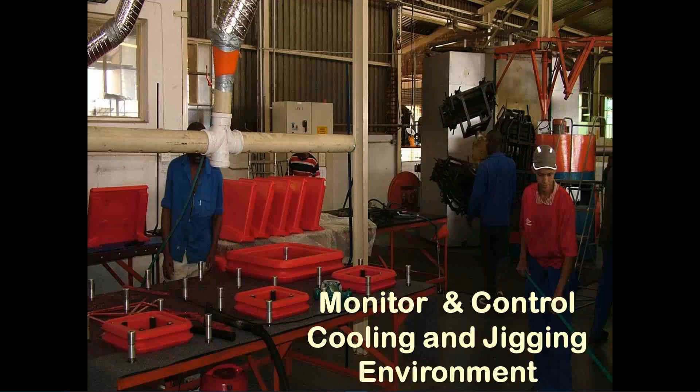I was fanatical about trying to be the best. Here's a picture of the environment of the machine - air-conditioned tables, guys sweeping there while they're working, cleaning. We eventually issued everybody with white jackets to make sure they stayed clean. You can see the condition of the machine in the background - the molds are black, and they're not dirty, they're black because they should be black. The machines are nice and silver. So yeah, I was fanatical about trying to be the best and do the best quality.

This product being molded here, by the way, was a job we took away from blow molders. So I'm very proud to say, even in small products, we took products away from blow molding because of our high speed - we could produce like 1,200 of these parts a day. All right, I started consulting in 2004.

And this was about 3 years before I actually sold my business. Professor Roy Crawford, a very good friend of mine, considered the guru of roto molding, visited my plant every year from 1999 until 2004, and eventually convinced me to get out and start teaching. Because in '86 I started traveling the world to learn - Australia in '89, Europe in '94, America - and wherever I went, I found I could teach. So Roy visited my plant and eventually got me to go out and teach. And that's where I am today and why I am here today.

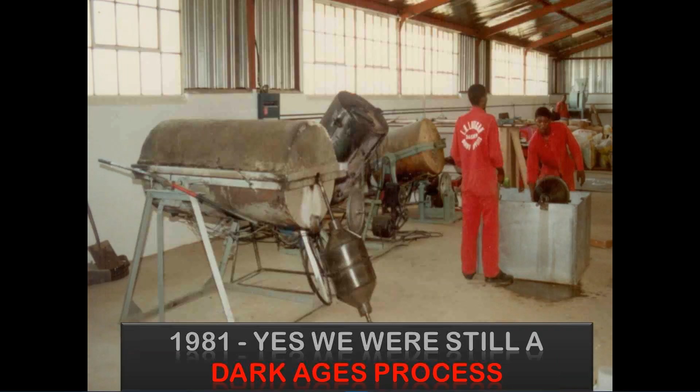The reason I got it up there, it was closed - totally closed. And if you see the molds there, sorry, there's somebody who's got quite a bit of interference on the mic. It sounds like there's water running. I don't know if anybody else can hear it, but hopefully they can switch it off.

But this mold, as you can see, was totally closed. The vent tube was through the shaft. So we would stand outside the mold in 1979, look at the machine spinning, and say, wonder what is happening inside the oven, inside the mold.

Unlike a lot of you in India today who still have open molds and open vent tubes where you can take torches and look inside, from day one I could never see inside my molds. I never had an opening big enough to look inside. So that became my obsession.

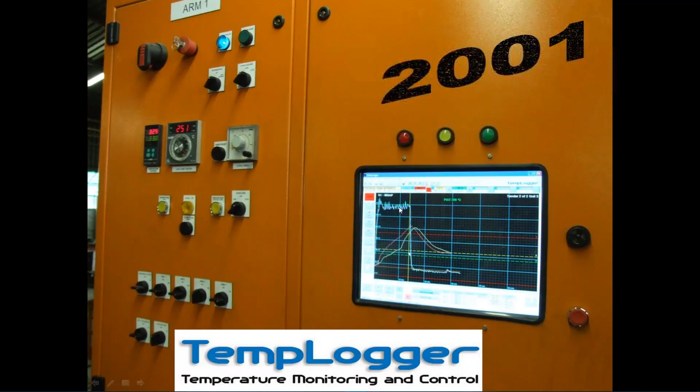I wanted to stand there and actually know what was happening inside the mold, and that was a passion of mine. My motto in those days was: measure it, and if you can measure it, you can control it, and if you can control it, you can improve it. But one of the things we could never measure was what is actually happening inside the mold.

So I started a journey of trying to discover what is happening in the mold. As I'm saying this, I'm a little ahead of myself on this slide - I think most get a feel of what's happening in the mold.

Now, I'm going to refer to India specifically all the time because this is mainly for India, and welcome to the 1 or 2 international guests - I believe more might be joining us later, some said they're not getting up this early. I'm very proud of Anthony, sitting in Argentina at 2 o'clock in the morning. Nobody can beat that one so far.

But to look inside the mold, if it is possible, like on R&R which I've just explained on my machine, it was not possible. Most of you will use torches and mirrors, again if it's possible. But then if it's a turret machine, carousel machine, or shuttle machine, it's not that easy.

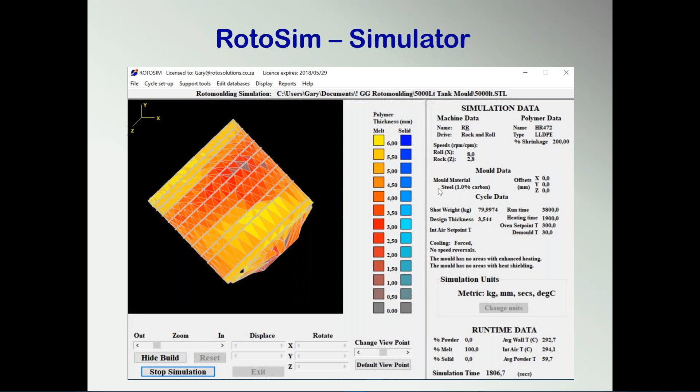So that you could actually use this program not just to simulate up front, but have it running live with live input from Templogger, or in those days Rotolog, showing the operator standing and seeing this mold spinning in front of his eyes, and he would actually be able to see what's happening, where the polymer is starting to stick. And if it wasn't sticking where he thought it should, or if he wanted it thicker, he could make real-time adjustments.

Now I'm going to start the first video, and I hope they work. So let's see - this is a simulation that I just did. That's your mold spinning, you've got all these settings on the side.

It's very complicated. I see on my screen it's running nice and smooth, and on the GoToMeeting it looks like it's quite jerky. Is that correct? Is it jerking or is it running smooth? Can somebody confirm?

Anybody confirm for me, is it running smoothly? Okay, so now there's the polymer sticking, the polymer starting to stick.

Now you can see, what you do is you import a grid, which you can generate in most CAD files, of your actual product from the drawing into the program. You then give it your machine settings, spinning at this RPM. This, as you can see, is a rock and roll with a 5,000 liter. So it's just doing the rock. There's the rock, and it's rolling at the same time.

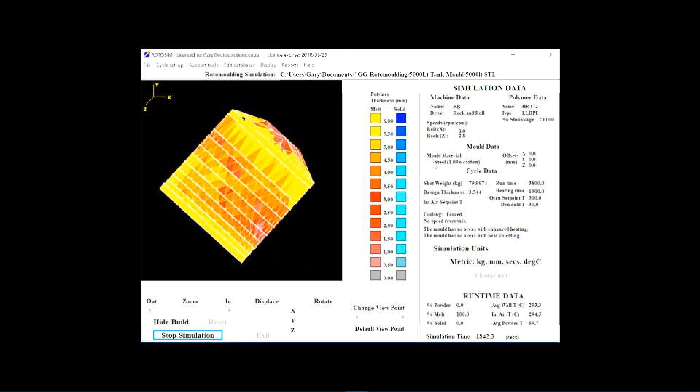I've shown it at some slow speeds and high speeds because I'm going to go back and walk through this again. What we found, without being able to see into the mold, is that if I spin quickly, the faster I spin and the faster I rock, the more evenly I cover the mold. So even though I couldn't see into my mold at this stage, I could predict what was going to happen in a simulation, and then go and try it.

We'd run it. We would actually run for when we estimated the polymer was starting to stick to the mold. According to RotoSim, it would say at about 10 minutes you've actually got product sticking there.

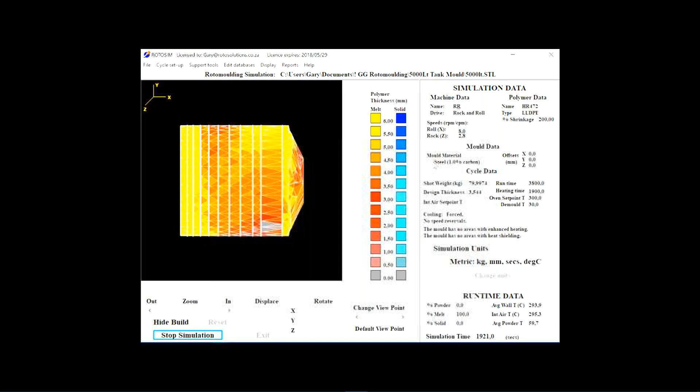You can see now, I'm just going to keep referring to the video. Now it's rolling in one direction. Some people call this a dwell. If you notice beforehand, we were just rocking and rolling. Now most of the world dwells, they stop in a position, and a lot of Indian companies do not dwell. I do not like the dwell.

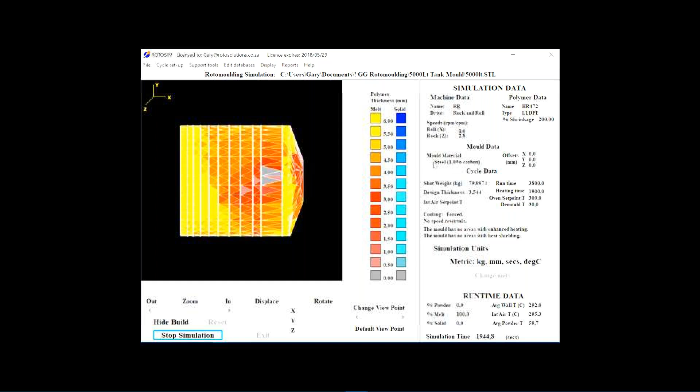Also your cooling, a lot of people will rock and roll while cooling, and yet in the cooling stage is when you don't want to rock and roll.

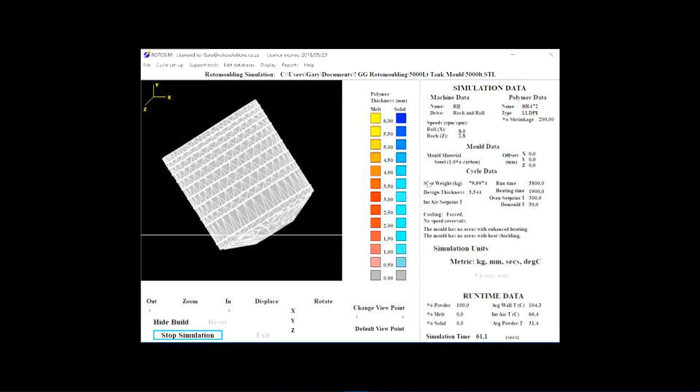I'll just let this run again while I continue to talk about it. That white line running on the screen is the estimation of where your powder is sitting, for those of you not familiar with RotoSim. In other words, if you look inside the mold, the powder is lying just at the bottom of the mold, okay, 90% of the time.

When the powder is lying at the bottom of the mold, and we heat the mold, and it rotates away from the flames, it starts cooling down. We've actually done tests showing the mold heats up as it passes, especially over open flame. Then when it goes away from the flame, if you're rotating too slowly, you'll find the mold surface actually cools down, and then you heat it up again, cool down and heat up. This is not good for our process, for time, for quality, for anything.

So playing with this tool, I was coming the closest I could to actually understanding what was happening inside the mold, but keeping in mind, I still never had eyes inside the mold. Great tool. I got them, I was one of the developers. I never paid for this program because I was considered a development molder. I used to give them feedback, what's wrong, what's right, what works, what isn't working. Even today I get demo units from them and I'd run them.

Must ask for an update. There's another program that's come on from a German university, but they're not selling it, which looks very good, more realistic looking. But RotoSim, for the average person in the field, can help you. It would be very interesting to know who's got RotoSim.

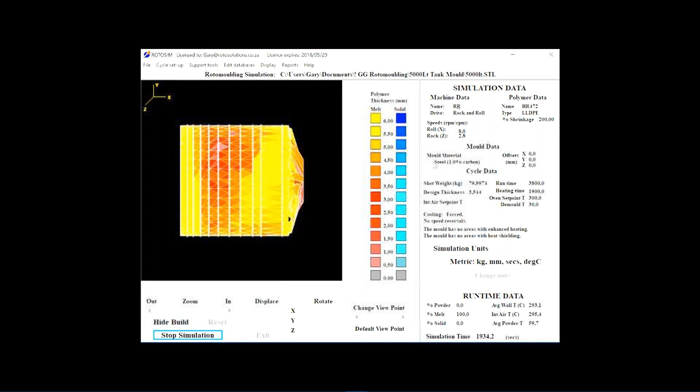Okay, what you'll see now is on the actual tank there are different colors. The different colors represent different wall thicknesses. This test we did very funny and very strangely, we just spun it at funny speeds and things just to get unevenness, to show people. Because if we coated this perfectly, it wouldn't actually show up. So in this case, while it was running, I did some crazy settings.

As you can see, there's areas that are gray, areas that are red, areas that are yellow. If you look at the bar on the right-hand side of the picture, it shows you more or less what the melt thickness was.

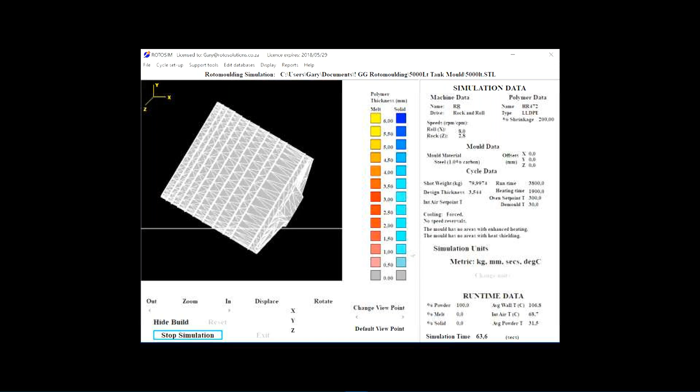Okay, so if it was yellow, it was 6 mm. If it was still gray, it had no material there at all. So just to give you an idea, it's a pretty good indicator, if anybody wants to know what's happening inside the mold or learn a little more. It's a good tool, I don't sell it - I should become the agent - but I wish I had owned this program and linked it to loggers so we could really get benefits from it. Anyway, that was another great tool. Now both these tools have been in the industry for over 25, almost 30 years.

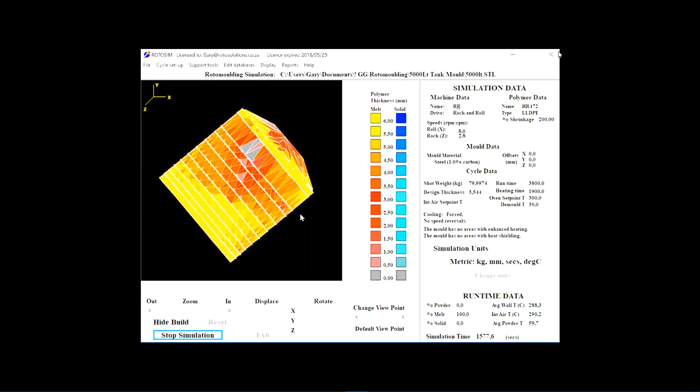Now, I have an issue here. I don't know how... there we go. Okay, couldn't get to the next step.

Unfortunately not enough work was done on it. I would have loved to have gone further, and still someday I might get to take this whole experience to another level. But when I sold my company, I stopped. What I realized is I actually stopped playing in my factory. Sorry, I don't know, my phone's making funny noises here, I don't know what's going on with it.

Sorry, what happened is when I owned my own factory and started Roto Solutions, I had the privilege of playing - designing something, putting it in the machine, experimenting with the frame, the molds, the wall thicknesses, the textures, everything I wanted to do, and seeing what the result actually was inside. Today, unfortunately, the only time I get to play is sometimes when I'm in factories who have the equipment for me to play with. But other than that, my playing and developing has come to a bit of a grinding halt. I must say, I've done some amazing things in factories.

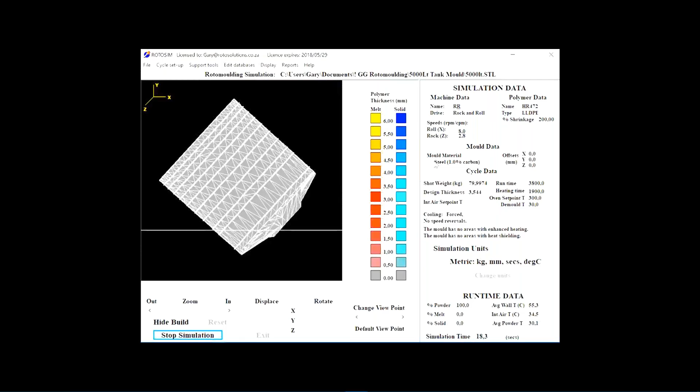Fortunately we had very quick releases on our molds that we could open very quickly. At a given minute we'd whip the mold out of the oven, whip the lid open, ruin the part, but see if RotoSim was actually giving us the real scenario. We never had any idea what was happening inside before this. When RotoSim predicts something is happening, we'd run it, put it on the PC next to the machine - even though it wasn't live - watch it, and say okay, it says this is what's happening. We'd stop the machine, whip it open, and look inside to see if it was correct. Then we'd play with the settings in RotoSim and open the mold at different times to see how real we could get it. So I wasted hundreds of tanks, tons of material, trying to prove what's happening inside the mold.

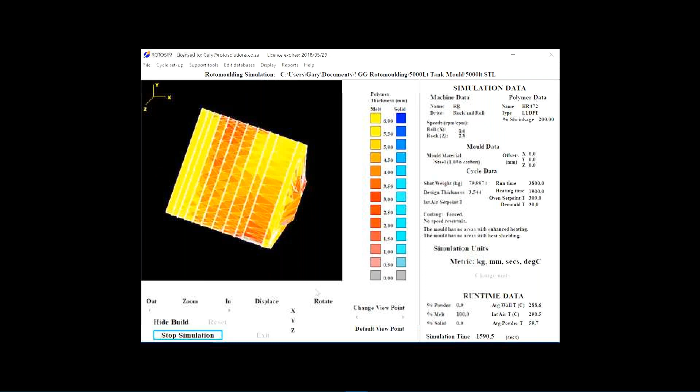We got it very, very close to the real thing. I don't know if any of you have tried that - just stopping the mold at a certain time. You're going to see later on, when I come to my real pride and joy, temp logger, we did the same thing: when the graph said this is what's happening, we opened the mold right then. You can look in with your torch, but you can't really see what's happening. The torch is such a small insight into the mold, and I'll explain why later. But this was the next thing that gave us quite a bit of insight into what's happening in the mold.

What you've got to keep in mind when watching these videos is the camera is fixed inside the mold, so it's a little confusing at first. If you're standing looking in with a torch, the mold is spinning and you're stationary. But here the camera is actually moving with the mold. Let me just start this video. I hope it starts - yeah, there you go.

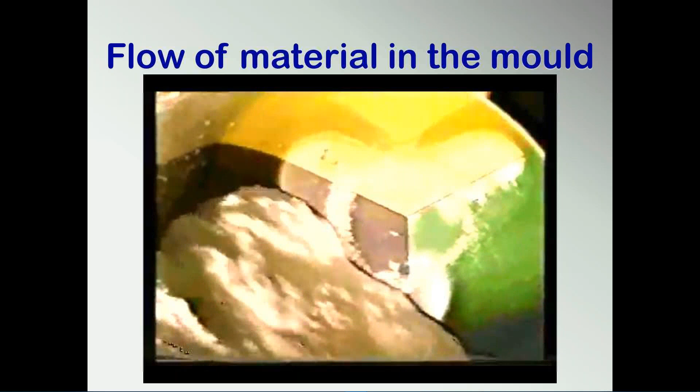In this first video, the camera was stationary, looking into the mold, with a triangular shape with different colors in the base, just to give you an idea of what is in what position.

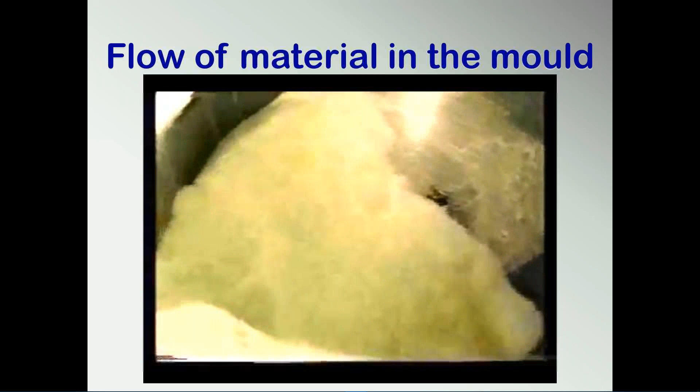Later on, I'm going to show you real-time videos in the machine. As you can see, if you were watching from the beginning of the video, you saw the point sticking very far out of the material, and now it gets deeper and deeper into the material. That is obviously the angle of the mold - the mold's going further down and up, down and up.

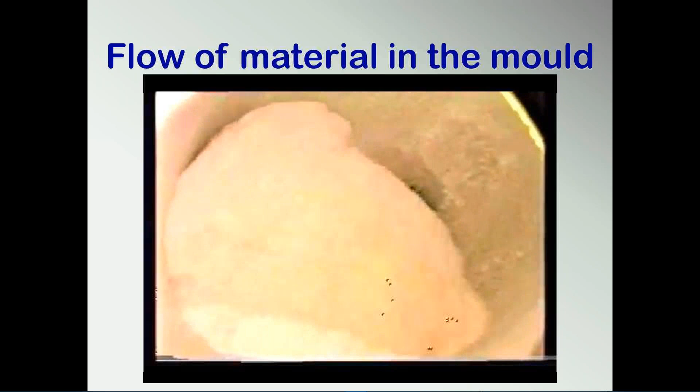I don't know, this is very, very difficult. I can't get any feedback if anybody understands what I'm saying, so I'm just going to have to push on. Talking to myself is very, very strange for me.

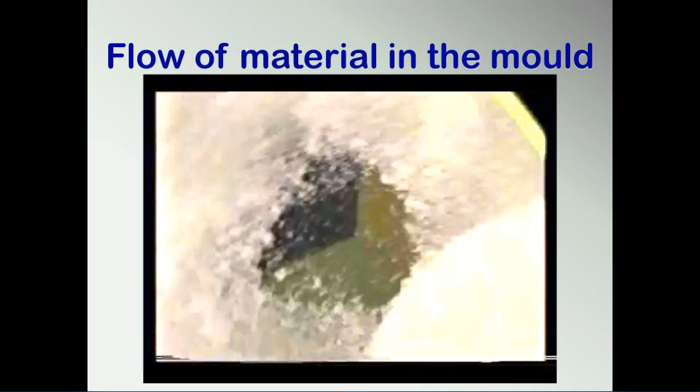But what you'll notice in the beginning of the video is the points were sticking out of the powder, quite far out, and then eventually the powder got up to the top and covered over it. That's because, take for example, in this case this was a rock and roll - it's going down, down, down, and then coming back up, up, up. But it's turning very slowly, just for the benefit of the video. This would never be this slow in real life, because you would never mold anything if you took this slow.

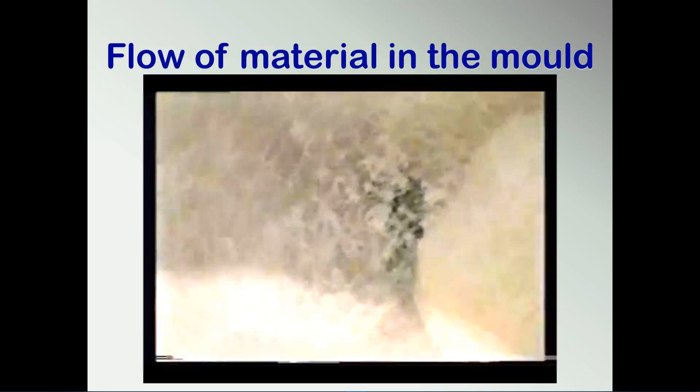You can see there's the powder - it's obviously the mold going down, down, down, so the powder goes over the top. The flow of the material goes over the top and covers the part, and as it comes up again, it goes out. Now this is the centering part.

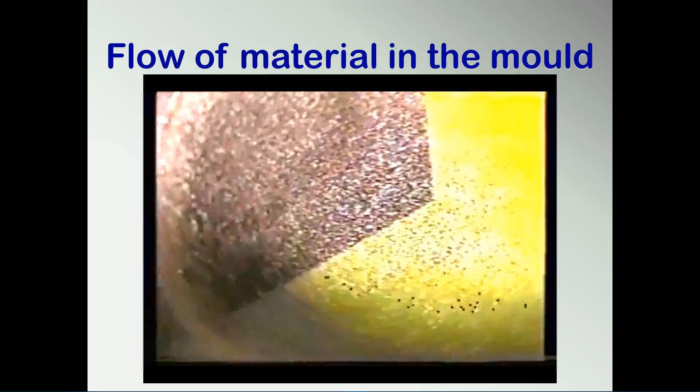Now the interesting thing for me in this video, more than the actual mold and everything else, is the flow of the material. The only way I can show this is to go back and start it again. Look at the flow of the material. For me, nobody was actually looking at this - everybody was looking at the mold, everybody was trying to prove what happens when you rock and roll.

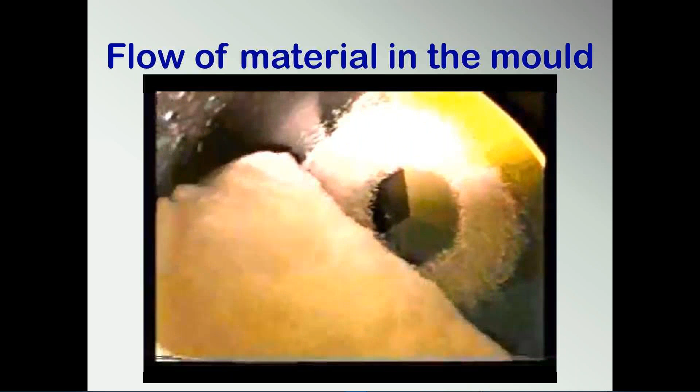Something I should mention, if any of you picked it up, is it goes forward and then at some stage it reverses. So you have to forward-reverse when you've got steps - ribs on the top of your tanks, these massive ribs and ears and things. You have to forward-reverse, otherwise you will not get cover on both sides equally.

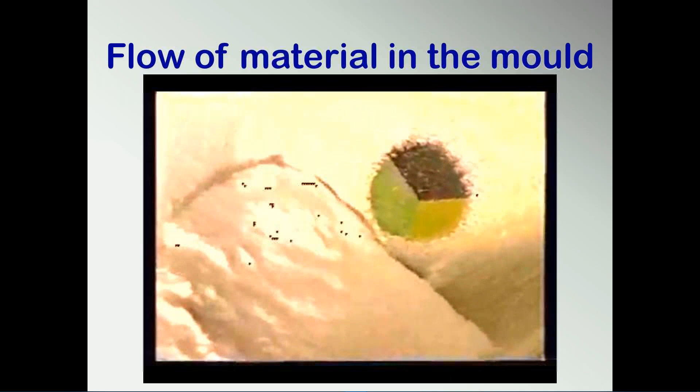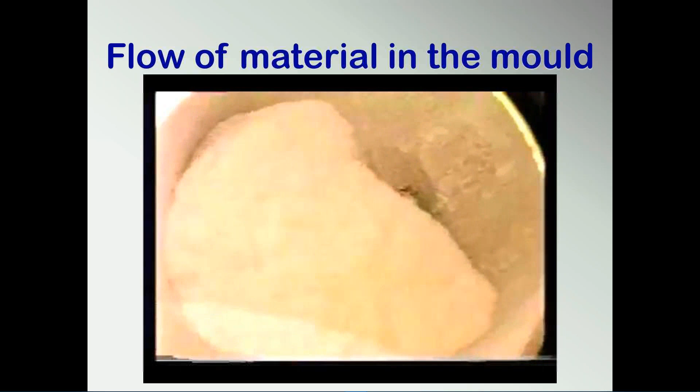Another issue proven here is if you go too long in one direction, you run out of powder because now there's not enough powder to cover the mold. And if you reverse after using most of your powder, you won't get cover on the other side. But the point I'm trying to make - and everybody was blown away that I was sitting looking at the powder - is that the powder is not flowing. It's what I call tumbling.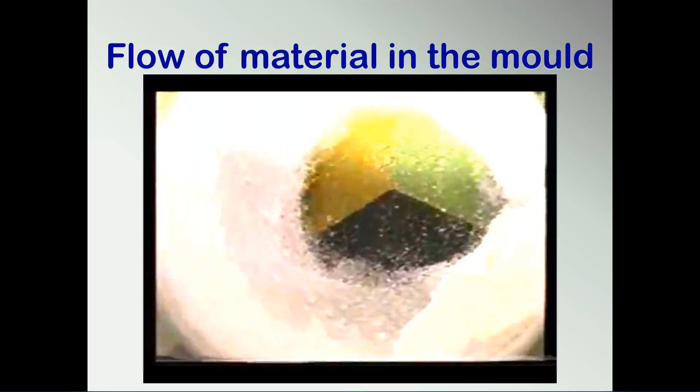I asked him, why does your powder tumble? Because I had played with open molds, not inside the oven, rotating open molds just to see how my powder flowed. And there's your reverse. Now it's going in the opposite direction, for those who noticed. That's your forward reverse coming into play. But look at that powder - it sort of climbs up the side and then drops, climbs up the side and drops.

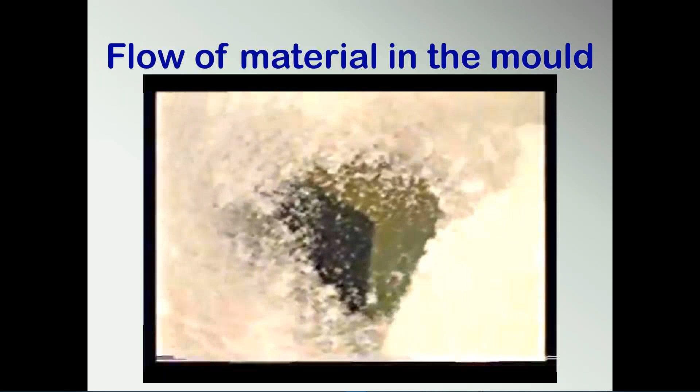This feature is actually built into RotoSim. They've even got a name for it - they allow for how the powder climbs up the wall. And I said to them, but guys, why is it climbing up the wall? It should climb up the wall, but it shouldn't - it climbs and then drops, climbs and then drops. It should be flowing. If you put water in there and turn it, the faster you turn it, the water will start climbing up the side, but it won't drop. It'll just flow up and cover evenly.

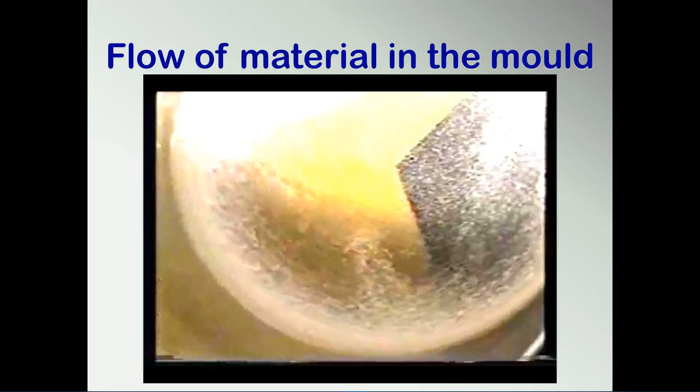In those days, the early 80s, I was telling people you're doing it wrong. And what I realized is I had a better grind than most, which I will address later as well.

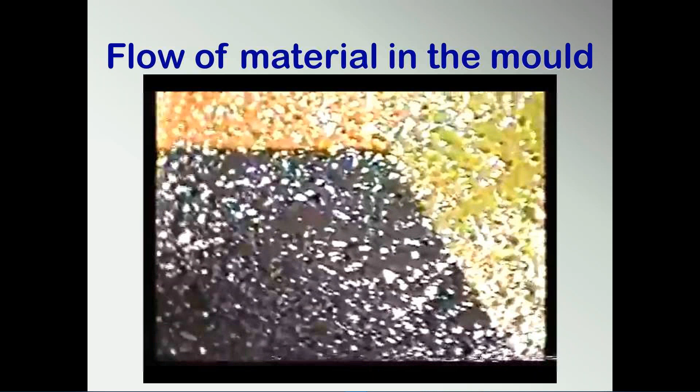While I'm at each video, I feel I must spend some time explaining to you what I'm seeing, because we can keep going back, but time goes quite quickly. I see we're already almost 8:30, and there's quite a bit to get through. So it would be very nice to know who's with me, who understands me - unfortunately, that I can't get.

So from looking at sharp corners like that, the way the material flows, we found out the mold design is very, very important.

And I've already mentioned it - ribs are not good for flow. It ruins everything. Too many people in our industry just love to put ribs into products, into tanks, water tanks, below ground tanks, everything - thinking we need to make this stronger, we need to stiffen this up. In my opinion, a pile of poo - that's the kindest and nicest way I can put it. Ribs are our enemy.

I'm sure I've told you in plenty of presentations about the two biggest court cases in the world, worth millions and millions of pounds, where both roto-molders lost their cases - four years in court because they had ribs and never had process control. They put ribs in thinking, great, to stiffen it up, but they didn't know what was happening in the molds. They didn't get the design right of the ribs, they didn't get anything right, and they lost millions and millions. I'm surprised - the only reason they both survived was they're both huge companies. I'm not going to bring them up again, but it's pretty well documented in all the journals what happened.

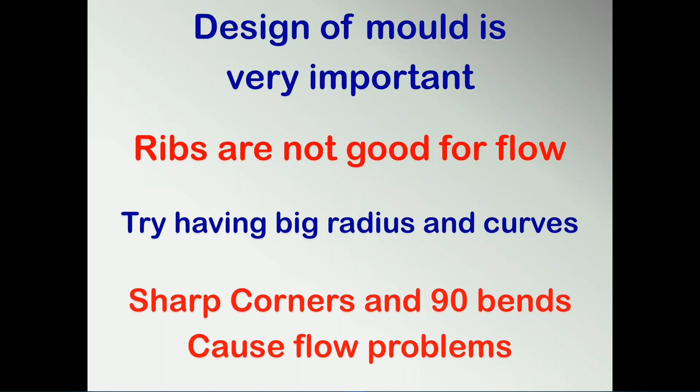Another issue, kiss-offs. A lot of people put kiss-offs into pallets, double skin parts, surfboards, panels, to keep them stiff and rigid and give strength. This is just an insight to show you—this is not a really great rib kiss-off design. But if you keep your shape in mind, if you've done kiss-offs in the past, watch this video: the rule of thumb is the gap between the two kiss-off parts should be maximum 1.5 times wall thickness. Gap between the two kiss-offs, 1.5 times wall thickness.

Because if you go more than that, you're going to have the issue you're about to see, or if you're closer, you'll have bridging, holes, and all sorts of other problems. Thin spot—people show me all the time, 'I've got a thin problem, I'm trying to thicken up here, but it's actually thinner.' It's all about design. So now let's see if this—again, very confusing.

If you look at this, keep in mind the camera's stationary in the mold, and that's why it looks like the powder comes running past every now and then, but it does. It goes down to one end of the mold, runs around, and eventually comes back here. But the point here is, watch.

It looked like they were building up a very nice kiss-off, okay, and it was, but the gap is too big. Because the gap is too big, as you start sintering, you start seeing what happens.

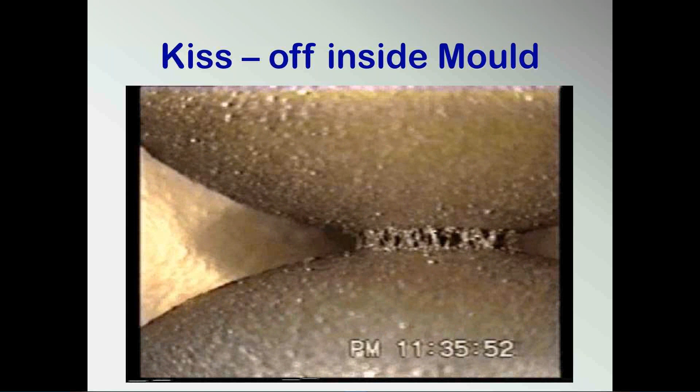Sorry? Yeah. Okay, you get the point.

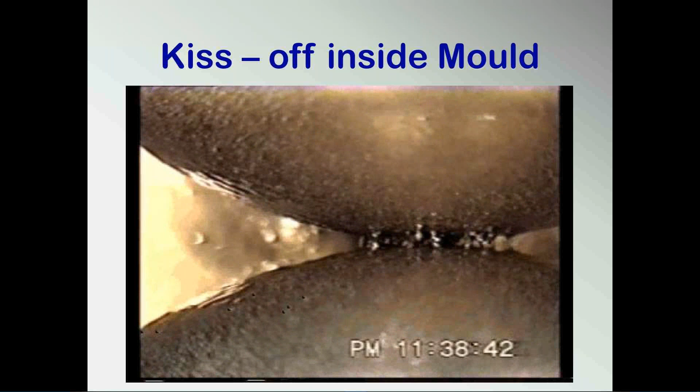In the beginning of the process, the first thing that gets hot - imagine if you've got two halves of a ball, and one half of the mold is 1 millimeter thick, and the other half is 2 millimeters thick. And you mold it. Guess what? The 1 millimeter part, when you cut it open, will be thicker than the other part. It's that simple. All the fines will start sticking first on it, and you'll have no pinholing on the side that's thin, while the other half will have pinholing. That's the simplest way to explain it.

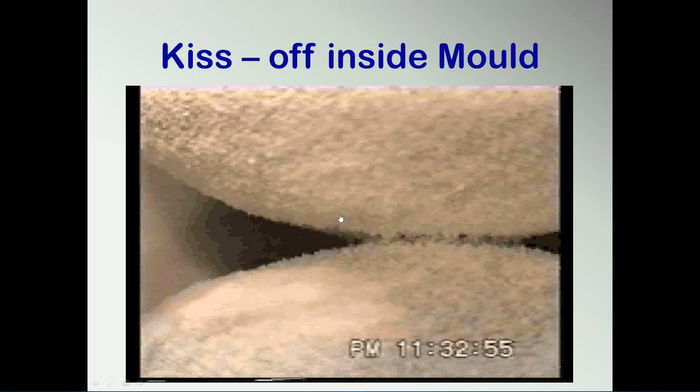I'm going to just step it up a bit, because there's so much. I'm talking about what's happening in the mold, and that temp log is one of the things - all these other things I'm showing you are vital as well. So let me move on. And then at the end, I'm happy to stay online if one or two people want to ask questions, but they're going to have to give me some answers to be able to help them. You can't just say one part comes out looking good, another part comes out looking triangular.

First of all, what's the shape we start with? What's the process? What's the cycle times? What's the material? What's the density? What's the, blah, blah, blah. Okay, let me just move on here. Okay guys, are you happy? Can I move on?

Go ahead, Gary. Okay, because right here, if you look right now, this is the next step of what I've just been telling you - design of the frame, the spiders, very important. The guys are coming with questions ahead of where I'm going to. The frame on the mold can affect the part. The spider, if it interferes with the airflow, can affect the part and what's happening inside. Keeping in mind everything I'm thinking of, these can affect the powder buildup on the surface of the mold.

Okay, so now just a little, the next video here will give you some idea. If you look there in the middle is the parting line, you can see clearly the parting line. But why can you see the parting line? The reason you can see it is because there's a flange there. And if you look everywhere in the end corners of the picture, when the video starts running you'll see the material sticking in other places but not here, because the flange is delaying the heating up of that area, so you get a thinning inside the mold.

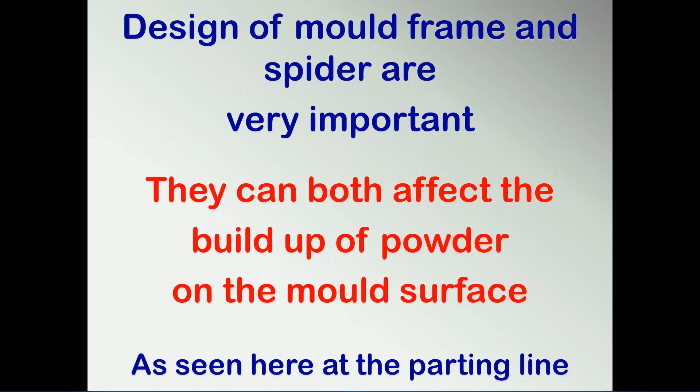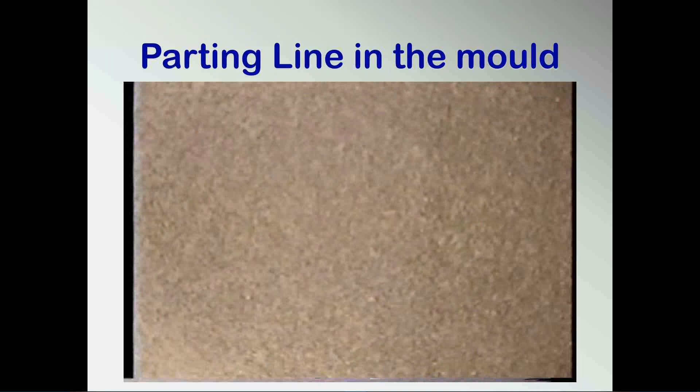They try and preheat the flanges so that they get thickening. In India, a very common problem you'll see in this video, if you can understand it, is you do a lot of double wall black and white, and often you see the inside color coming out at the flanges. The reason is because the flanges take longer to heat up, so no black sticks there, and when you put the white in, the white sticks. I hope you guys get these points. That line in the middle is still there because the flanges delayed the heat up, and when the powder came, it did not cover it. So, very important.

A lot of people online here, I know, have walked into their factories and just said, cut the flanges, drill holes in the flanges, remove the flanges. You got it all wrong. Especially with your stainless steel molds. When you've got a stainless steel mold with a 12mm flange, and it's two 12mm flanges, that's 24 millimeters of stainless steel that doesn't like to be heated up, sitting at a parting line. It will delay the heat getting into that area and will affect what is happening inside the mold, the powder buildup.

The next point covers that threads, and not only threads - it covers your kiss-offs, your pinholing, webbing of powder. If your powder isn't right, as I showed you in the first video, it's not flowing, okay?

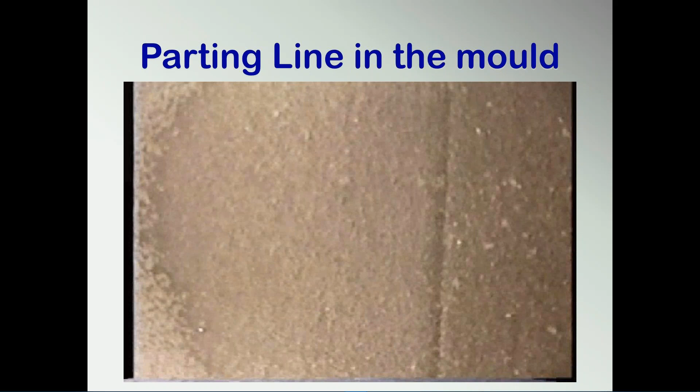The powder is not flowing here in this first video. The powder is building up. If you look at this powder, it's not flowing like water, and that causes a problem. This should be flowing like the water I showed you in the bottle earlier. If you can get it to flow like water, you will solve a lot of your problems.

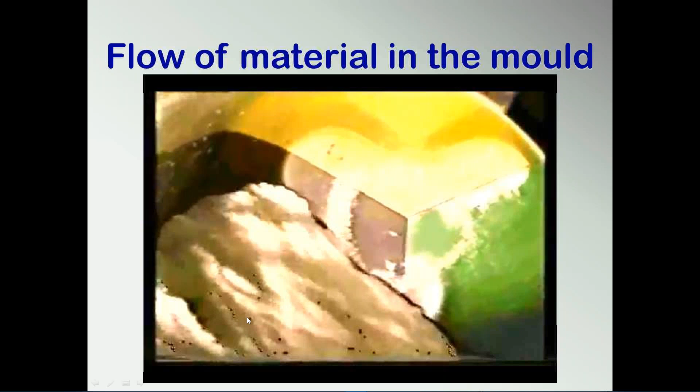So now, what we developed when I was still very active in Armo - when I was in Armo, I said the first thing we have to do is improve our powder, because if we have a bad powder, it affects what happens inside the mold dramatically. If your powder doesn't flow in the mold, as you saw in that video, it climbs up the wall and drops, climbs up the wall and drops.

When you've got flat areas, one client asked about getting triangular shapes and things like that - this can be the problem. It could be powder, it could be release agent, there are a number of things that affect it. That's why it's not easy to answer, but you have to have your powder right and your heat source right, and then understand what is happening in the mold when you spin it, to get a good finished part on the inside without pinholing, etc. So this standard is the first and only standard. It's the cheapest test in the world, and if you don't do it, you're already starting wrong.

This is just quickly how you do that. This is an old video from when we were developing the test.

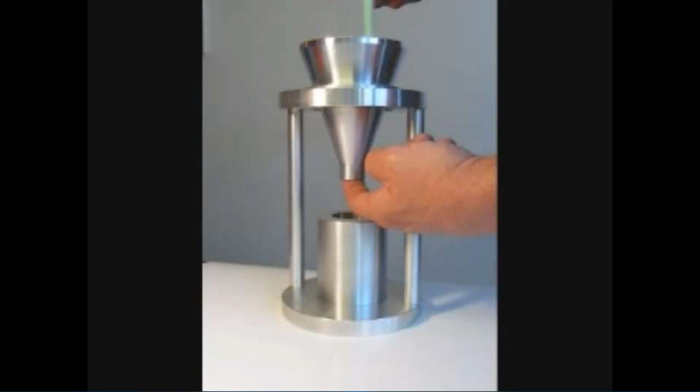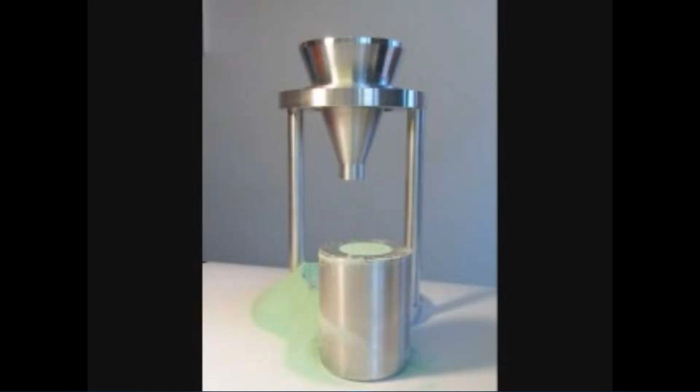Okay guys, that quickly is the simplest test you can do in your factory. If you put any powder into your mold without knowing the quality of the powder, and that you have a good powder, you are going to have thread problems, which one person has. You're going to have kiss-off problems, which another person has. You're going to have differently shaped parts, flat spots, sparkling, because it's not flowing in the mold properly. So powder is very, very, very important.

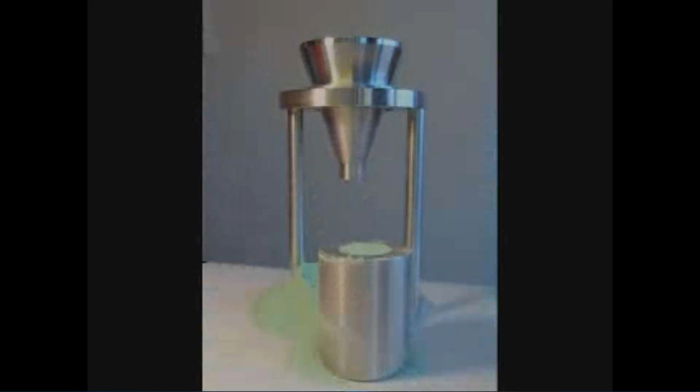This next video - I don't have time now to explain every detail, I could talk for two days on this subject you've given me, I've had to compress it and try to make it interesting. But in this next video, if you look at it, their powder is stuck on the mold, the fine powder already. Very few people know and realize that material can actually move - this is the material moving on the mold. It's a high melt flow, done on purpose to show you what can happen. This is a 7 melt flow, which is abnormally high for most rotomolders, and that's why we'd like to use 3 to 3.5, because otherwise you'll get this kind of effect.

The reason for this high melt flow comes back to another big issue: an insert and a graphic. You can see the graphic coming through there, and shortly you'll see the insert. We need the powder to get under and around that insert to create a thread, which will be there later on to screw something into.

It can also be related to your thread that you're molding. Look how watery it's getting there. The insert had been overheated, okay? So you can see around the insert it's actually running like liquid already, where the rest is still flowing around.

The point I'm trying to make here is sometimes there's things happening in the molds. If you overcure and you overheat, you will destroy the polymer and you'll destroy the part. And when it comes out, it could be buckled, it could be wet, it could be anything, it could be brittle, it could be whatever. So this is just another interesting case, these tests were done for other reasons, but just to give you an idea that material can actually flow in our molds, okay.

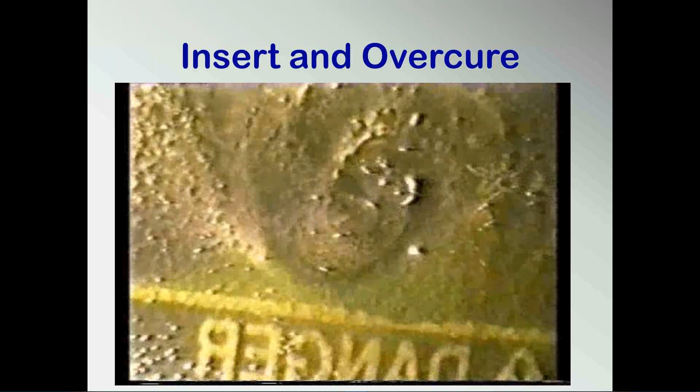I'm not going to waste time on this. Insert and overcure, that's an insert there, ridiculously overcured at the insert. Done on purpose, trying to solve the problem of pinholing around the insert, but everything done in this video was done for the wrong reason. Later on, all we did was got the powder right and the insert to heat up faster, and problem solved. What I've been saying earlier.

A lot of people chase in the wrong direction, and I'm just showing you, we didn't always get it right first time. Until we understood what was happening in the molds and had more insight, we could actually start doing something to change it.

And that is why, here's another showing the cooling process. The polymer, when it's really molten, as you saw in the beginning, is almost transparent. This is the infrared camera showing the different heat scales around the inserts and things. And then as it cools down, you see it goes from a clear product to a baked product. And then you can actually watch how it delaminates off the mold and where it's sticking to the mold, etc.

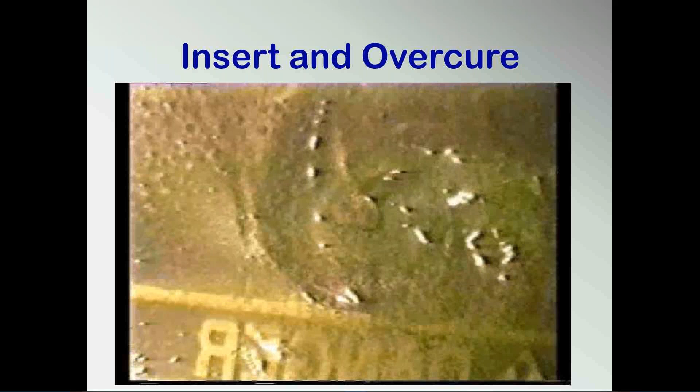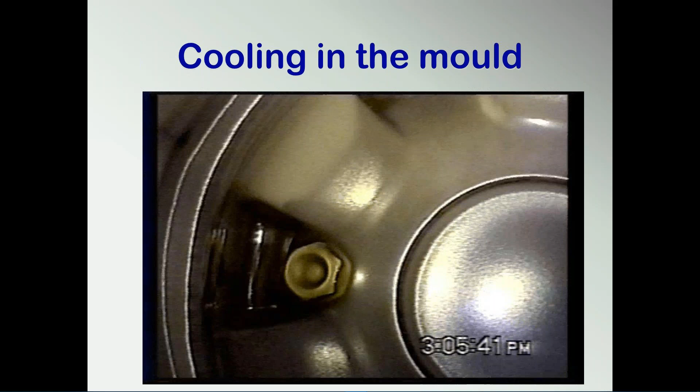There's a lot of talk around whether we keep it in contact with pressure to the mold surface, or do we get it out? I'm a firm believer in demolding very hot and getting it out, especially in a case like this with inserts and all sorts of things, because if you leave it - and this also answers some of the questions asked about buckling and different shapes - if you've got inserts, undercuts, and one time you overheat and overcool, the next time you heat more correctly and cool more correctly, you'll have different quality parts, different shapes, etc.

When I know what your process is, whether you've got undercuts, whether you've got leaking flanges - a leaking flange is one of the worst things in roto molding, you all know that I say that. It destroys products, it builds in stress, it does everything wrong. So just a leaking flange: if you've got leaking flanges and you've got problems, go home and sort out the leaking flanges, and you'll solve a lot of problems.

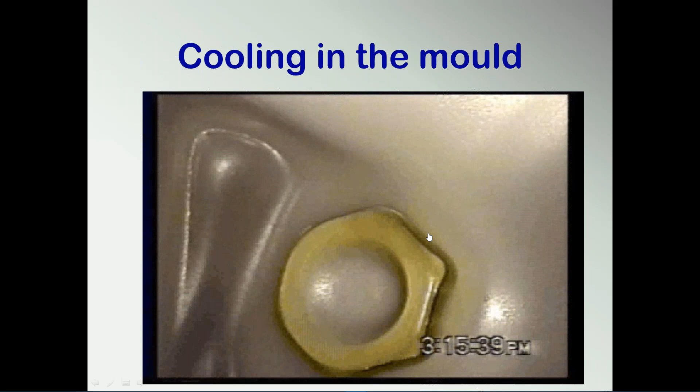We soon discovered that a leaking flange is like an insert, and it's holding the part where you don't want it to be held. Way back in about 2005 or 2006 in France, I walked in and I just cleaned the flanges for a guy who was having rejects and rejects and rejects. We sealed the flanges, got them flat. He said, we're wasting the whole day on the flanges. I said, no, we're not wasting the day. The next day when we put it in - he had paid me to be there, and all I did was fix flanges, and he paid me a lot of money - but the next day, all his problems were solved.

And then he looked at me and said, Fig Jam, and he nicknamed me Fig Jam. I won't repeat what that means, but I got this nickname around the world. It's like saying, I'm good, just ask me. That's what Fig Jam stands for. I solved all his problems just by cleaning the flanges and checking his temperature.

Anyway, here's another one that's interesting, in India specifically, it's an open flame.

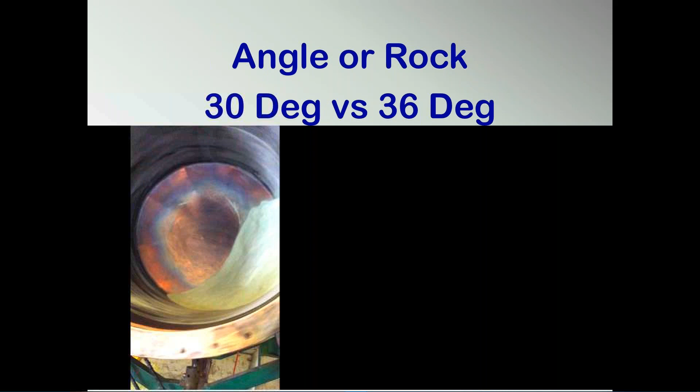If you look at that video, unfortunately, it's very noisy, I can't talk while it's in. If you're spinning, too many machines do not go down far enough. Rock and rolls between 30 and 36 degrees. You're going to see the difference.

That first one is 30 degrees. You can see it doesn't even cover the base properly. The material doesn't get to the middle of the mold properly. And if you put more material in, it will cover to the middle, but during the process, as it's laying up, you will lose material and end up with thinner spots. So angle is very important.

Here's a 36 degree, same machine. Oops, what's going on here? Now I'm seeing the sound and not the video. Why has that happened? I don't believe this. What's happened to this video? I tested and checked this video over and over and over.

By tilting the machine a little bit further, you get a perfect scenario, a solution.

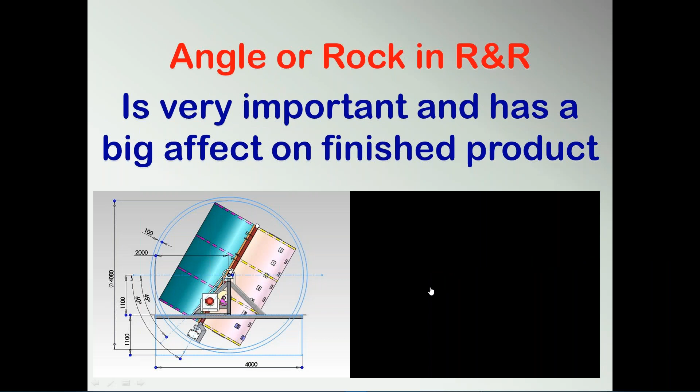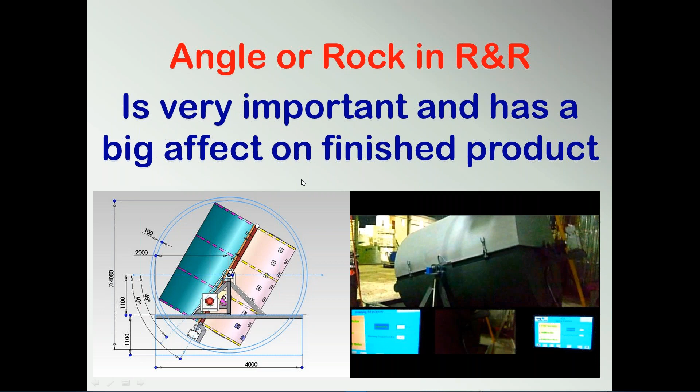We had a machine at one stage called our Rock and Roll 360. This machine normally rocks to 45 degrees on a rock, both sides, 45, and it can also do 360 degrees when required. So 45 degrees was our standard. By 2004, we never had a machine that didn't go down to 45 degrees, and no dwelling, which solved a lot of problems. And it's only because we looked inside the molds to see what was happening that made us do these things.

Rotation speeds are another thing. The faster you spin, the better the heat transfer, but if you don't rock to the right angles and spin fast, you create problems. Now let's see if these videos work.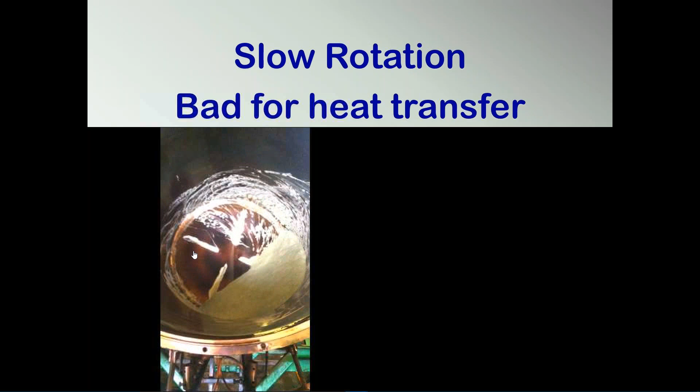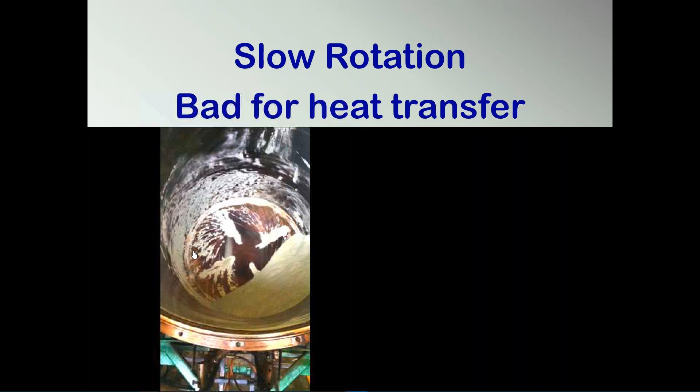Again, if you look at a video like this, they've got ribs in the bottom to try and help them scoop the material into the middle. Where in actual fact, you can just tilt the oven a little bit more. Now, why is every second video not working? There's something really strange going on here.

I don't know, sorry guys, I tested this last night again and it all worked. Oh dear, I don't know what is going on here now. But if you tilt the machine 5 to 6 degrees, you can get a completely different result.

So angles, tilts, and rock and rolls - I love rock and roll machines, I love rock and roll machines. But if they're wrong, if they're open flame, they're wrong. If they tilt to 30 degrees, they're wrong. If they rotate slowly and they don't forward reverse, they are wrong. So there's right and there's wrong.

I showed you a short clip of one of our machines that we developed years and years ago, and it is a master. I call it the dream machine. It can do anything any machine can do, and it's a rock and roll. But if you've got the wrong rock and roll, stay far away from it, in my opinion. What happens on the outside of the mold has a massive influence on what happens on the inside.

I'm just going to speed up a bit now because I'm running out of time, as always with me, unfortunately, on what happens on the inside of the mold. So we've got to pay attention to the outside, like the frame, like the spiders, like everything. With an infrared camera, you can have a look at a huge error that most people make - they put too many molds onto an arm thinking if I put more on, I get a better conversion rate. Wrong. It's better to put less on and keep spinning flat out, get even wall thicknesses and do it correctly.

We produce faster than anybody I've ever seen in the world. I think I've been to, I keep saying over 500 - I can comfortably say probably over 600 rotomolding plants in the world, from the biggest and the best and the fastest in every country to the smallest, the meanest and the leanest. And I've never seen anybody produce as fast as we did in our machines. Reinhardt, who's on here, has got a super fast one, and they advertise very fast. They are fast, yes, but in my day, nobody came near us.

Fast is good, but if it's all wrong like this, it's going to cause you more problems because you can't get the airflow around the part. So if you don't get the airflow around the part on the outside, guess what? You're going to have problems on the inside. The spiders here are creating problems.

Afterwards, when you're cooling - on the left hand side is when it's going into the oven, and the right hand side is when it's coming out of the oven. You can see all the different heat spots and hot and cold spots.

Sorry, I'm getting a call from Virpal. Hello? Is there a problem? I'm getting a call from you guys. Virpal, is there a problem? Hello? Gary? Yeah, Gary, you need to complete it fast. Okay, thanks, so I'm being told I've got to complete it fast.

Infrared can help a lot, okay, but I'm going to jump off that. This is my most amazing tool, TempLogger, and I was asked to give you some insight into this. I've shown you Roto, I've shown you infrared. The tool we developed was TempLogger, a version of Rotolog, but in my opinion the Rolls Royce of these systems. I see I've got 10 minutes left. What can be learned using the internal air?

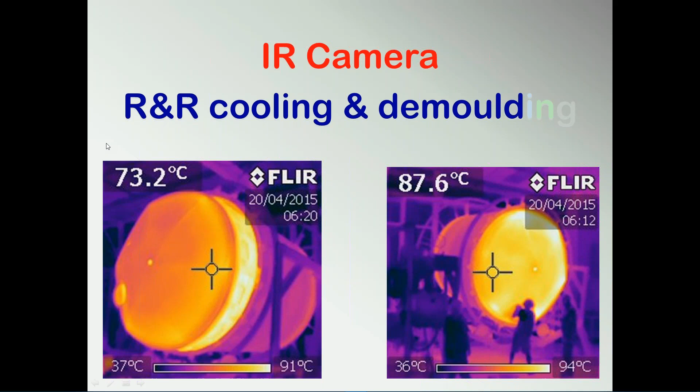Besides PIAT, which is the peak internal air temperature - peak internal air is a must, and we have to get there. If you don't get there, it's going to affect the quality of your part each time. If you have different peaks, different PIATs on each product, you will have different quality. So it's important, and the whole trace inside, the air internal trace, is very important. You've seen these graphs before, most of you, how it builds up etc. in the mold.

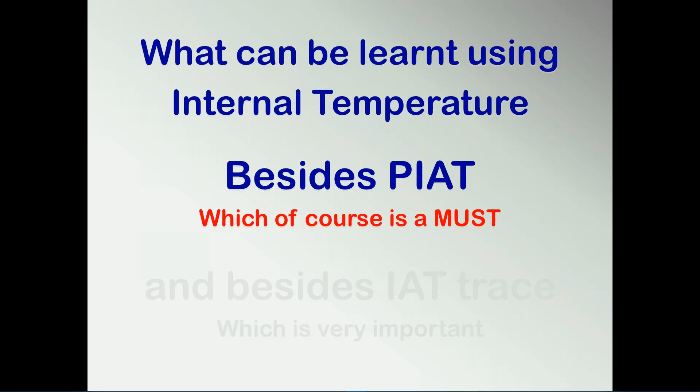And then you've got your cooling cycle - what happens in your cooling cycle? Very important - every step of the way will create a good part or a bad part. Sadly, I'm now being forced to run a little bit faster, but I'm going to go to this picture here.

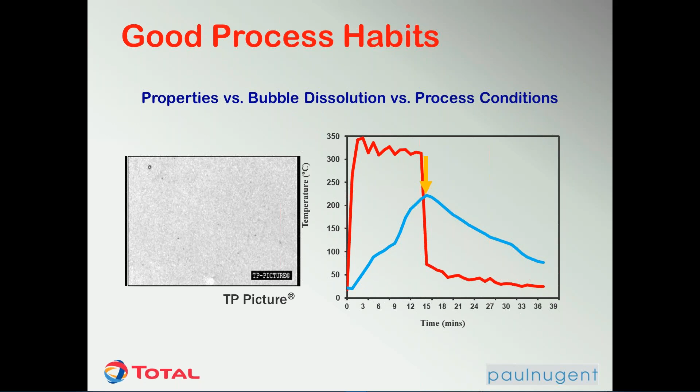If you have a temperature monitor or anything that resembles any kind of temperature reading, you can learn a lot about what is happening in the mold. Even though it's not eyes in the mold, this is the closest we will get at this stage. One day, hopefully, we'll have cameras inside the mold to watch it, and that is one of my next goals.

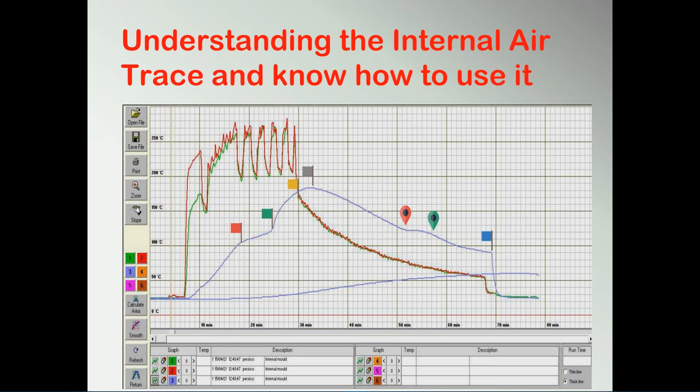So having control, this is a 3-layer product, by the way. The first layer, you can see the oven goes up, comes down, and we get the temperature we want for the first layer. Not too high, not too low.

We are just laying up the polymer. As soon as the polymer is stuck on the mold, we then introduce the second layer, not too high, not too low. With control, we know how to do it correctly every time, within 5 degrees.

It got to an excellent cure for this polymer, with 3 layers.

Okay, I'm being called again. I think I have to stop now. Hello? Hello? Vidbal, I don't know why it keeps cutting off, but I think it's calling me. I don't know if that's the end. Sorry, I don't know, he's sending me messages.

All right, guys, I would like to spend more time on this. There are so many things you can do with temperature monitoring. It is my baby, and unfortunately I didn't really get to it. But anybody who's interested, please contact me, and maybe I can do another webinar just on temperature control if people are interested. I think what we all have to do is let Roma know what we want to hear. If you guys would like to hear more about temperature control or design or anything, I'm available.

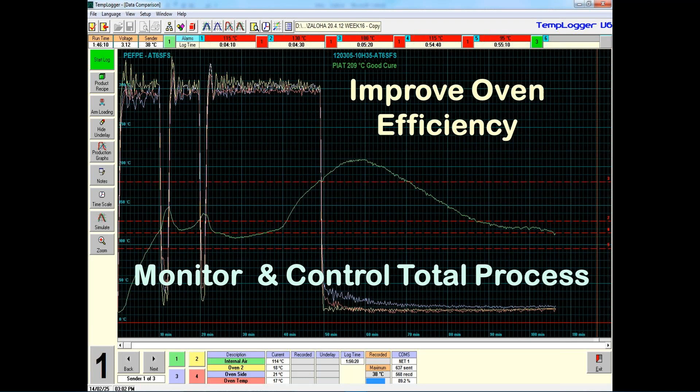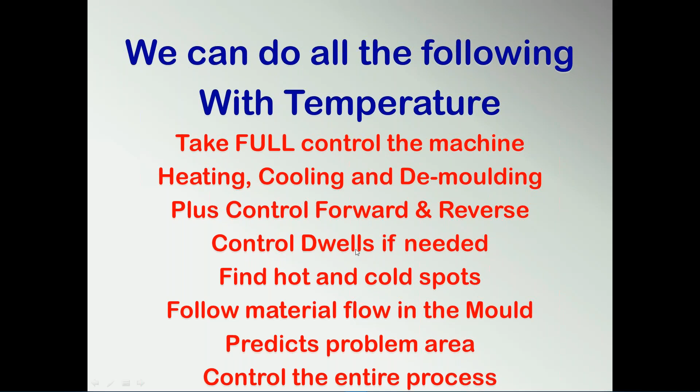Here's my hero, Roy Crawford, who gave us TempLogger, awarding me a prize years and years ago. I just want to go right down to the end of my presentation - this is everything about temperature monitoring. I'd just like to say to you guys, it's been awesome.

Thank you for having me. It was very strange talking to myself.